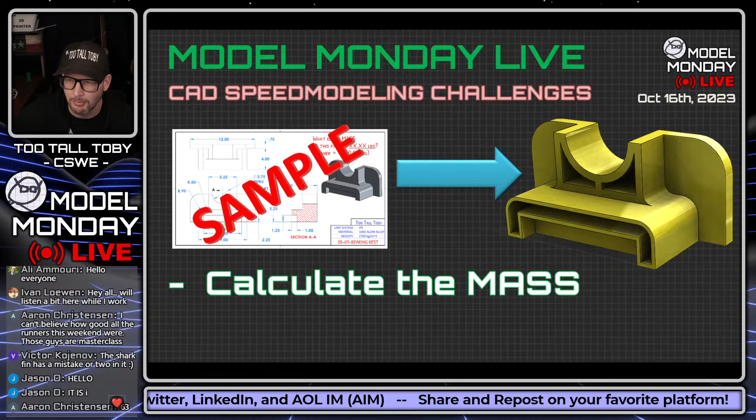Your challenge today is going to be to take a 2D print and turn it into a 3D model as quickly as possible. You're then going to try to calculate the mass of that 3D model, and you're going to enter that mass directly into the YouTube chat. The first person to calculate the mass correctly will win the point for the day.

And today is October 23rd. Hold on a second guys, I got a little bit of an error in the PowerPoint. We're going to do a live correction here. Just look over there for a minute, don't look at what this guy's doing over here. Just look over there, let's make this 23rd. Right, it's the 23rd, we got this, no problem. All right, perfect, yeah, it said 23rd the whole time.

So the basic rules are that you can use any 3D CAD package you want. You can input the density, output the mass. You can use a specified precision, and the first correct answer in the chat will win the point for the day. The units that we use in this modeling challenge, this weekly challenge that we do, is IPS or MMGS.

The materials are plain carbon steel, 1060 aluminum, and ABS. The densities listed are straight out of the SolidWorks library of materials. If those densities are different in your library, you're going to want to create your own custom library for these materials so that you can quickly calculate the correct answer. So be sure to check these materials, grab a screen capture so that you've got them in your library.

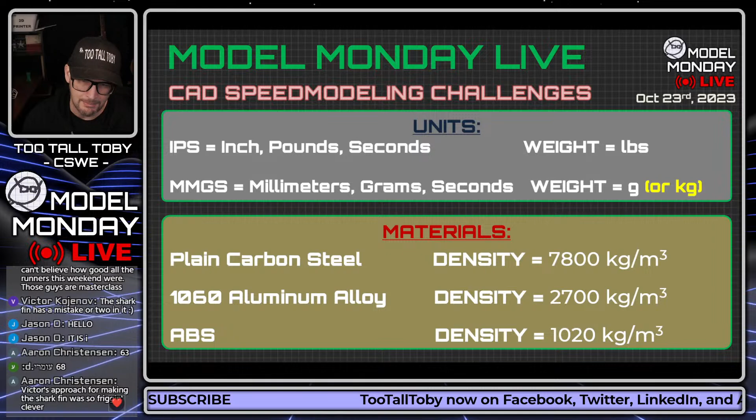Make a custom library. I've got a video showing how I create custom templates in SolidWorks and how I use sensors in SolidWorks. I've also got a video on the Onshape YouTube channel about how to create the custom materials in Onshape for these challenges. So make a custom materials library, that way you can add those custom materials more quickly.

The advanced rules are this is meant to be fun and good-spirited. Now guys, just want to say that I know that with the Victor K and the Will match, I made a mistake, and the mistake was that I gave the point to the wrong person. I gave the point out incorrectly because I misread the answer.

But what has not happened yet in the tournament is there hasn't been one single print so far that has gone out missing a dimension. And I gotta admit, I'm a little surprised about that, and I'm kind of waiting for it to happen. It makes me very nervous because I feel like it's inevitable that I will release a print and it'll be missing a dimension, and then both of the runners are going to be just kind of scrambling and not really know what to do. And because it hasn't happened yet, the stakes keep getting higher and higher, and it's exactly what Victor's saying is exactly what I'm worried about.

It'll be in the finals. Everything will be built up, you know, it'll be like one round to one round, and then I'll miss a dimension on the print and then have to scramble to resolve that issue.

I'm very surprised that hasn't happened yet. It has happened a couple of times on Model Monday Live, so it really is meant to be fun and good-spirited, and eventually I will make mistakes like missing a dimension on the print or something like that. If that happens, we'll just have to figure it out together. And the Ivan exploit is permitted during Model Monday Live, so if you see any opportunities to use the Ivan exploit, feel free to do so.

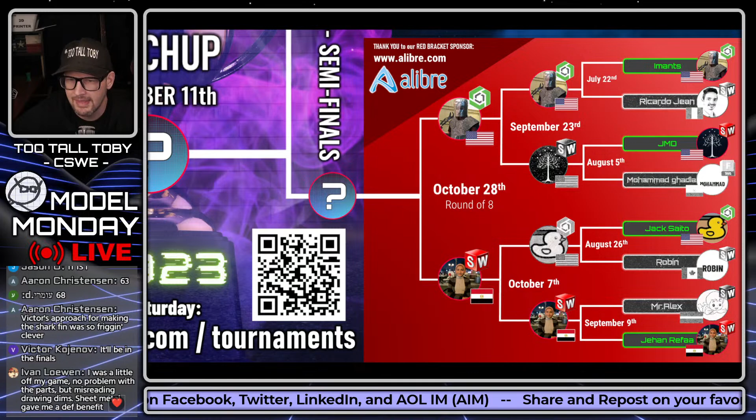The red bracket's going to feature Imants running Onshape this Saturday versus Jehan Refaa, the last standing Egyptian in the tournament. Jehan is running SolidWorks. So a little Onshape versus SolidWorks action.

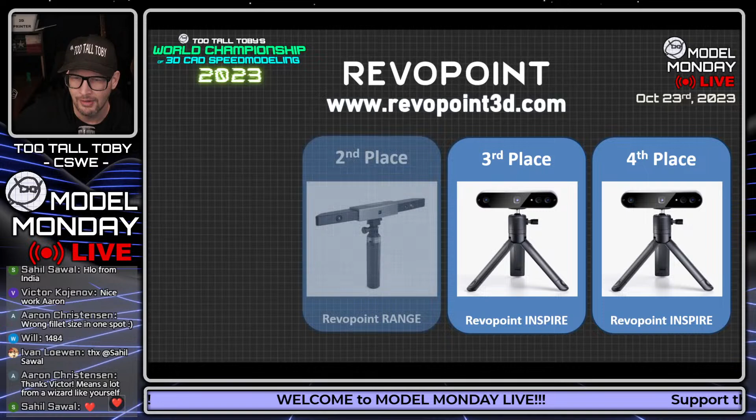The top 4 finishers here - Ivan and Victor have already locked up, guaranteed themselves a 3D scanner. And Aaron C versus Pranav, Imants versus Jehan Refaa - we're going to see who gets in there and wins a 3D scanner this Saturday. So very, very cool stuff here for our top 4 runners.

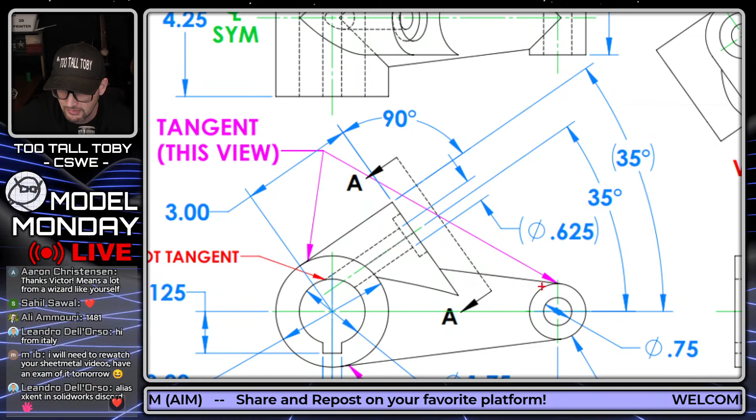There's also some tangency issues happening with this model. The conical face runs tangent to this cylinder, and the conical face runs tangent to this cylinder down here. Because of this tangency, it really makes sense to create these cylinders first, and then go back and create the cone, which when we create a cone in Onshape or SolidWorks, any 3D CAD, we generally create as a revolve. So you create one cross-sectional profile, and then you revolve that about a center line.

That's how you create a cone. And then the final feature on this model, which is going to be pretty tricky, is going to be this upper section, this tombstone shaped section that's getting extruded down into the rest of the shark body. The solution that Victor came up with, I thought, was super clever, creating that geometry as an extrude and then doing a full round fillet. That's definitely not how I would have done it, but I thought it was such a clever solution, and I think this gives us a good opportunity to maybe see a different solution, but definitely impressed with the solution that Victor came up with in the live stream this weekend.

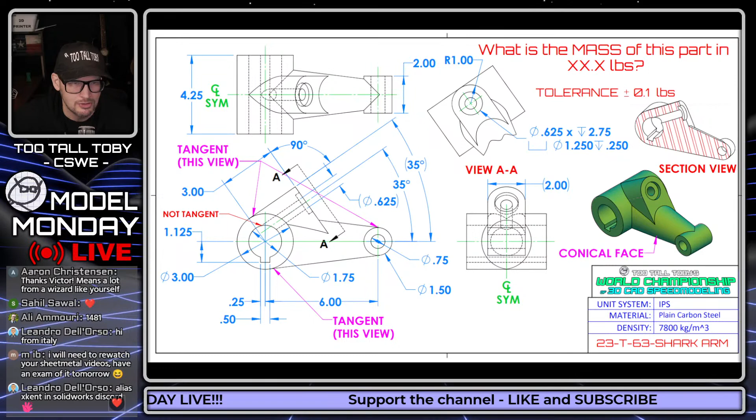So if you want to go back and watch that live stream, go for it. But for today, what I'm going to do is try to model this up using Onshape in just a few minutes here.

So let's get into Onshape here. Here we go. And once we get into Onshape, let me just bring up the PowerPoint again. Okay, so once we get into Onshape, what we're going to do is go into a new document. So we're going to say create document, new document. This is going to be called

23-T-63 shark arm. So this way, if you want to sign up for a free account of Onshape, onshape.com/free, you can actually search for this document in the public space, and then you can see the entire feature tree. You can see everything that I'm doing here.

So I'm going to start out by going into my workspace units and changing my workspace units to inches and pounds just to match the drawing. And then, like we discussed, I'm going to start out with the geometry that represents those 2 cylinders.

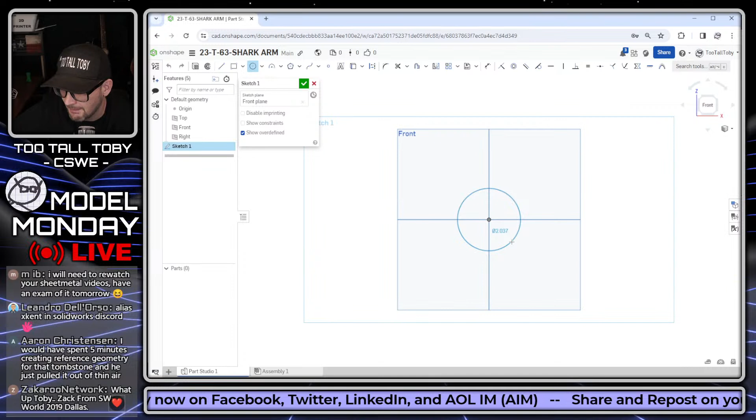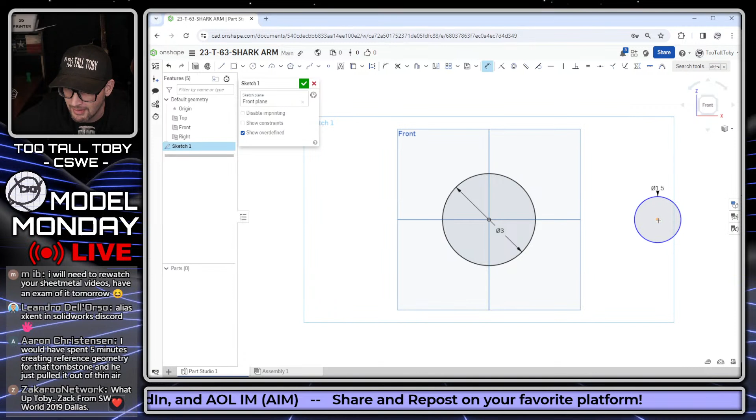However, in this first sketch, I'm going to opt to create basically all of the layout geometry, or at least quite a bit of the layout geometry that I'm going to need for this model. Because what you learn about CAD, especially if you start using a different CAD system, is that oftentimes you can create geometry and then use and reuse that geometry in other areas of the model, whether that's through contour selection in SolidWorks or just kind of the natural way that Onshape works.

Different CAD packages are going to work a little bit differently, but sometimes you'll find that it is beneficial to create a significant chunk of the geometry in the original sketch, or the original layout. A lot of times I think of this as layout geometry. I don't think of it as traditional sketch geometry, but a lot of times you can get in here and create this kind of layout work and then take advantage of this later on in the design process.

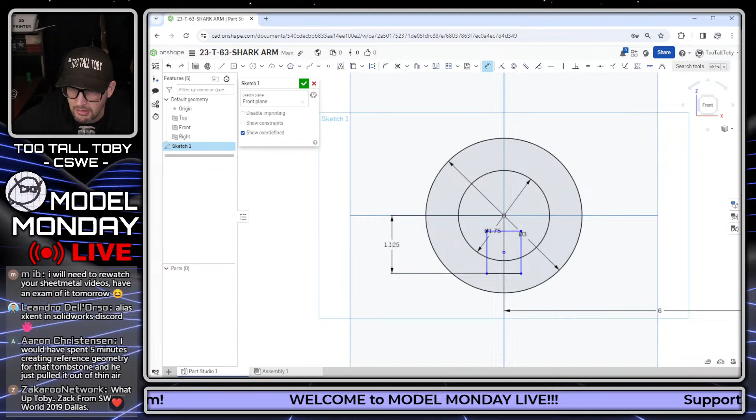So I'm going to just create a large chunk of the geometry here in this initial sketch, and then try to use this geometry a little bit later on as I'm creating the final features for this thing.

We don't need to trim in Onshape. We can just kind of leave that geometry as is, as extra.

And then I'm going to create these tangent entities here. So this tangent line that comes down, and then this is just going to come down to the center. I'm just creating half of this shape because this is going to be my conical shape here, so I'm just creating half of this model. I'll take this and make those tangent, and then I'll take this and make those tangent. That is going to set me up pretty nicely for doing that revolved shape when the time comes.

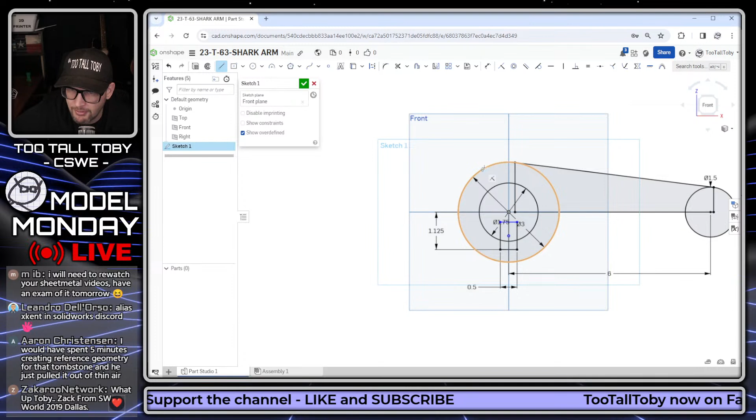And then the final thing here is maybe creating that region that goes from this line tangent up to this area. I don't have to create this entire shape because I'm going to end up creating a plane at the end of this point here. But this is just kind of a different way of approaching this model.

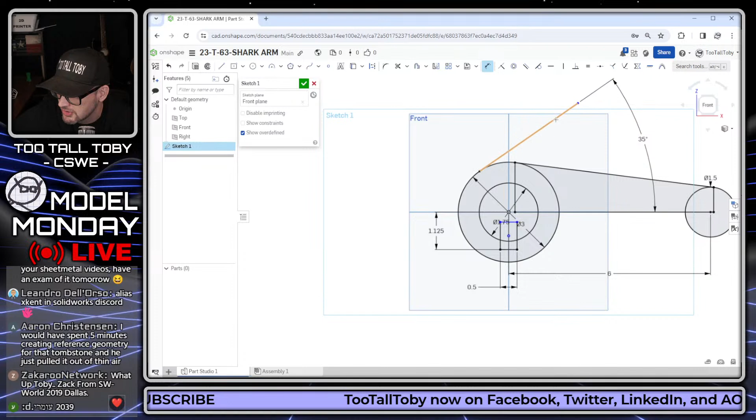That's what I wanted to show you guys today, just a different way of maybe coming up with this solution. The way that Victor did it, I really like the way that Victor did it. I encourage you to go back and watch that live stream. But this is just giving you guys a different approach to creating the same result.

All right, so now that I've got this geometry in place, I'm ready to jump into my first extrusion. My first extrusion is not going to be of the entire sketch, but just of one portion of the sketch, maybe just of this kind of circle here.

A little trick in Onshape that you can use is if you pick the circle first and then jump into extrude, then it'll just get that circle. Although in this case, I didn't get exactly what I wanted. All right, that's all right, I'll just go through and pick the regions here.

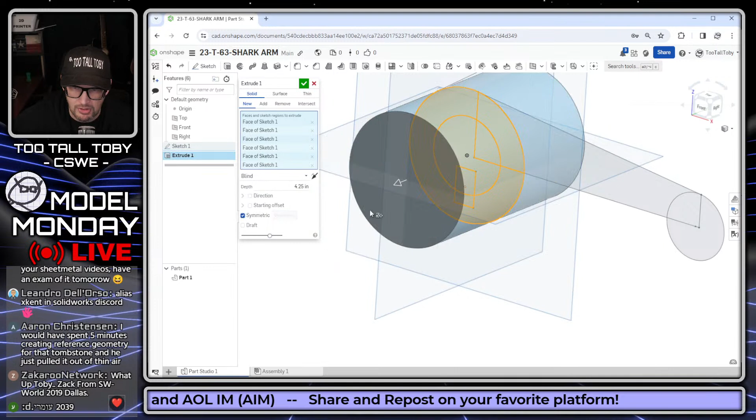So now I'm going to turn that into an extrusion with a depth of 4.25, and I'm going to say that's going to be symmetric so that it goes right down through the center. And now I'm going to show that original sketch, and I'm going to do the same thing here with this back section of the model.

So we're going to go into an extrude here, take this out to a depth of 2 inches, and again, we're going to say this is going to be symmetric.

Now we're going to jump into our revolve command. So for our revolve command, we're going to be using this geometry here and then this axis, and I think that'll give us what we want. I think I saw either Victor or Juiced revolve it this way, and I was like, oh, that'll actually work.

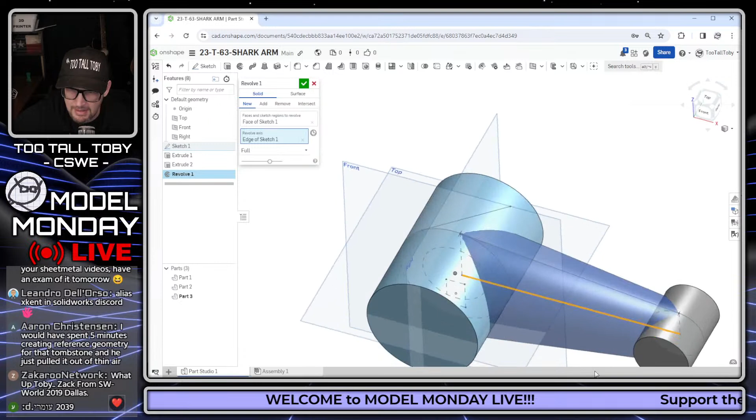That's interesting. I don't know if we need to go and get the additional entities or the additional regions here as part of that sketch. I think it'll be kind of an identical result. I guess we'll find out at the end here when we get to the mass properties of this model. But I think that's going to give us what we want there.

One way that we could... I guess we're not going to be able to see the tangency if we were to try to check it. So, all right, I'm not going to worry about it right now.

So now what I'm going to do is I'm going to pick this line and this end point here, and then I'm going to jump into a plane command, and that creates a new plane perpendicular to that line at the end point. And then I'm going to start a new sketch on that plane.

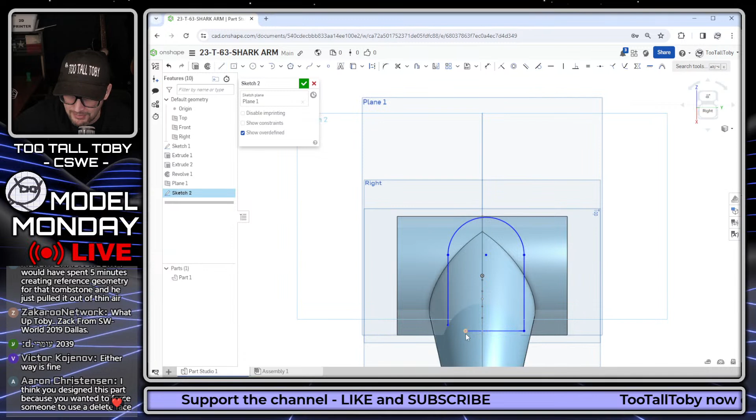This is how I would have created this geometry. This is how I actually did create this geometry when I was auditing this model. Instead of creating it from the side view, I would have created it with this kind of tombstone shape, and then use this tombstone in Onshape to create my extrusion. Definitely a different approach here, working from the geometry that's on the auxiliary view.

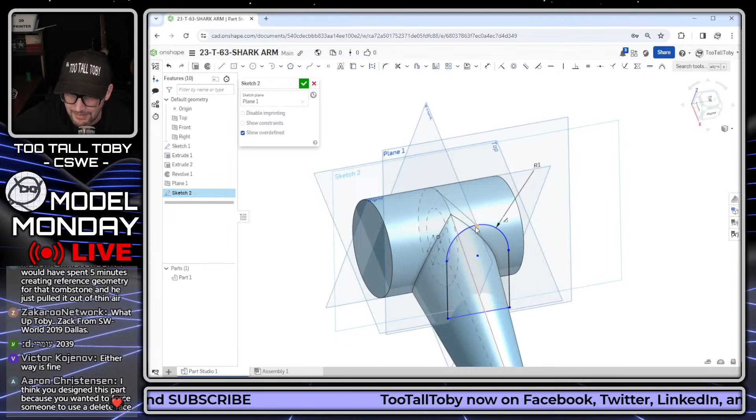And this was, when I saw the way that Victor did it in the live stream, I was really surprised and impressed, and definitely different from how I would have done it. But he came up with a great solution that definitely worked.

Shout out to Victor for coming up with that solution.

The problem with this solution, the gotcha, is where do I really anchor this lower line? You just have to look at it and make sure it's buried in the model. You can actually see it here because I'm extruding the wrong way, so it is buried in the model.

So then I'm going to do a reverse direction here, and let's see if we can go up to next, what the preview shows. Okay, yeah, that looks pretty good. That's what I want. It's looking a lot like what I'm seeing on the print, so I'm going to hit the green check mark there. That gives me the geometry that I needed for that region.

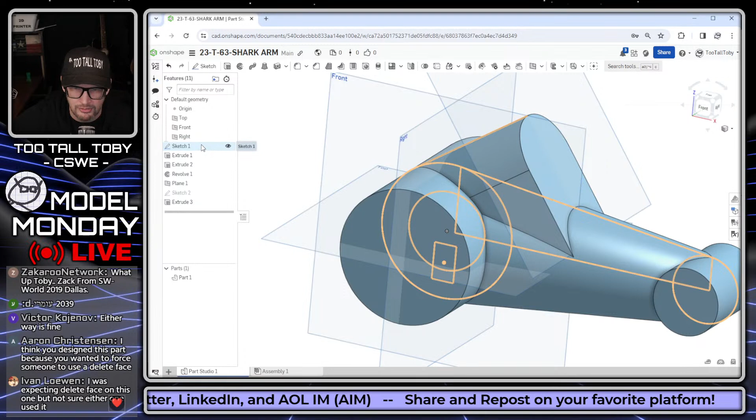Now I can go back to my original sketch here and use that original sketch to do my remove. I'm going to remove the tombstone shape here, so we're going to get this region.

So when a sketch is embedded inside of the model, you need to use the tilde command to select the interior region. You just hold down the tilde key on your keyboard while you're selecting.

And then this is going to go through all symmetric, through all in both directions. It looks like I have one more region I got to select there, so I just hold down the tilde key and choose that other one. There we go. That gives us that keyway shape.

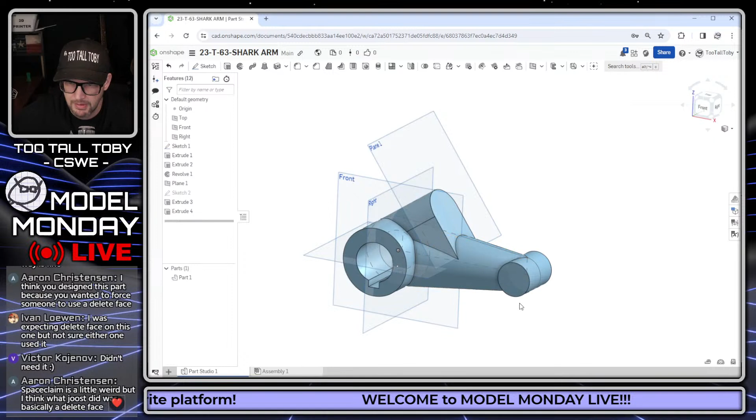Now for this end here, I could do this as either a cut extrude or as a hole. For me, I'm just about as fast as both. I know some Onshape users are a lot faster just making the holes, but I'm not quite there yet. So I'll do an extrude, remove, through all.

And then for this final hole here, again same thing, I could do it as a cut extrude or a hole. Let's try and do this one as a hole. I'm just curious if I can actually get it to do what I want it to do.

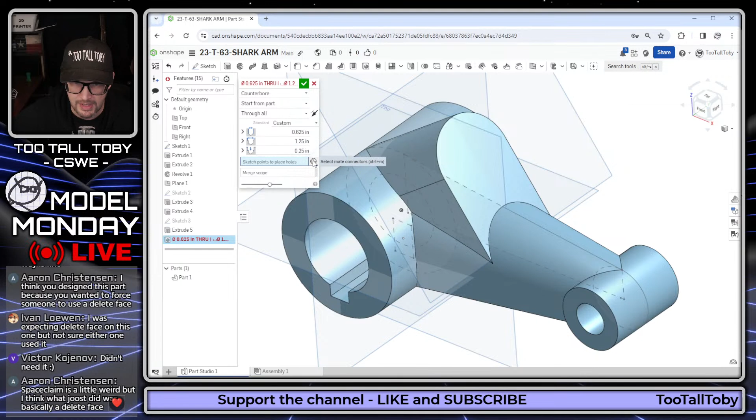So this is going to be a counter bore, and then the counter bore parameters are going to be 0.625, tab, 1.25, tab, 0.25, tab. Then for the location, I'll pick this option here for the mate connectors, so I can pick this edge and activate the existing mate connector that's on that edge. Onshape would tell me it's not making a new mate connector, it's activating the existing one.

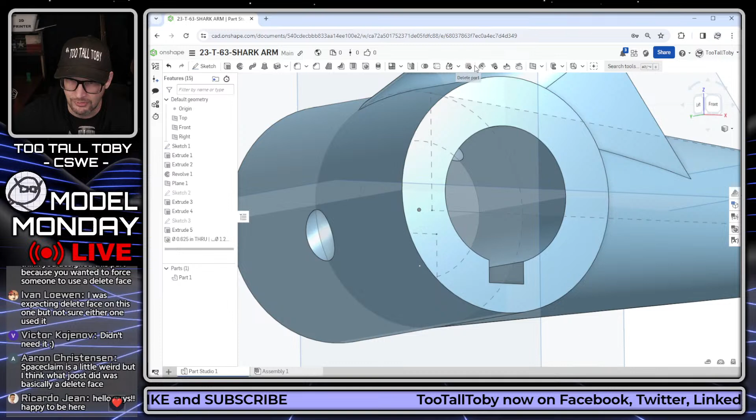Then what I can do is hit the check mark, and that leaves me with this hole running through all. Then I could do a delete face for that hole. So delete face, pick this face here, and hit the check mark.

Wait, didn't give me what I wanted. Wait, do I have to leave open? No, cap, or no, heal. There we go, there we go. So I could do it with delete face. We always like delete face, we get bonus points if we do a delete face there.

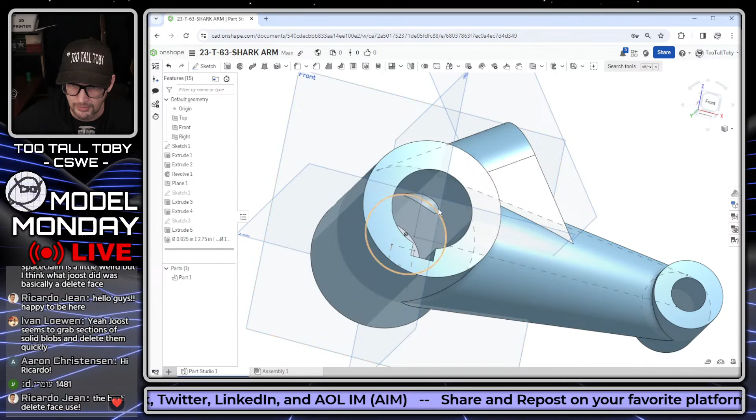Or the other way we could do that is to edit this feature here, and instead of this feature being a through all, we could say we want this to go blind. I do have the depth listed there on the print, the depth I think I listed at 2.75, as a kind of helper to help out the runners, letting them know there's a depth to that. Either way, I would do it with delete face, because delete face definitely gives you the ultimate extra point you can get in this game.

So now I'm going to do an assigned material. This is made out of plain carbon steel, so from the TTT custom library we're going to go plain carbon steel, pick this face, go to our mass properties, and the mass is 11.7 pounds.

And that is correct, I remember that one actually, I don't have to look at my answer key. I don't know if I'm going to remember the next one, but I do remember that one. So 11.7 pounds is the correct answer for that model.

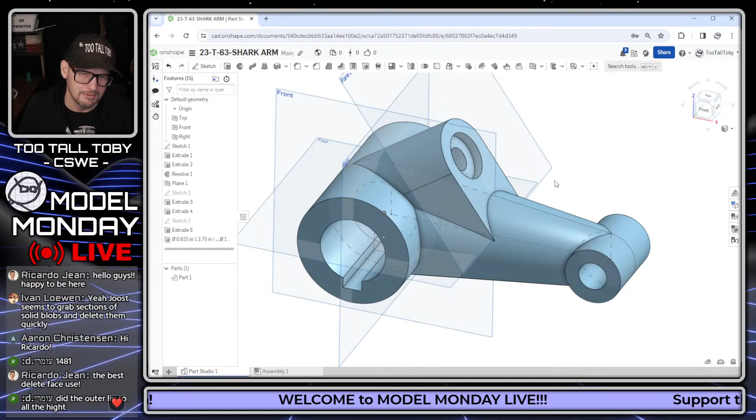And that's how you would do the shark arm in Onshape. I think you could pretty much do the same thing in SolidWorks, with the exception of the hole wizard working a little bit differently. But the rest of the stuff I did, you could do all in SolidWorks as well. You could create that entire layout as the first sketch and reuse that layout for all your features, and do the same thing in SolidWorks.

Of course, if you want to see the way the absolute master does it, check out the live stream from this weekend, and you can see the way Joost did it using SpaceClaim. But that should be pretty close.

Goncalo says SolidWorks crashed before finishing the first part. Yeah, that could be brutal. That's definitely something I don't miss. I don't really get that much crashing with SolidWorks, but I do get an awful lot of it just going unresponsive, and then coming back however many seconds or minutes later. That's definitely something I'm enjoying in Onshape, that really doesn't happen - it just kind of is there waiting for you to work, not you waiting for it. So that's something I like.

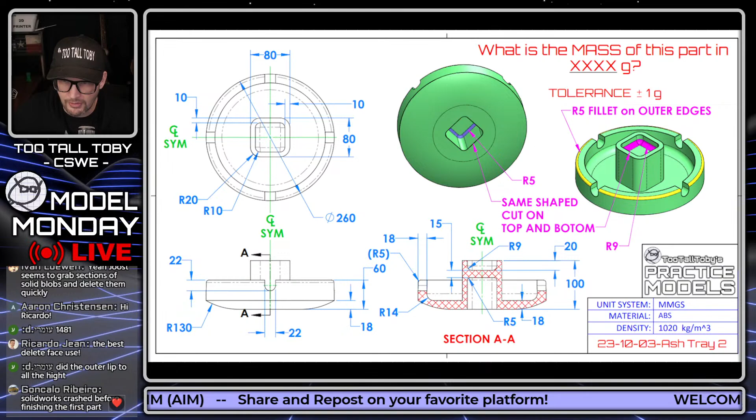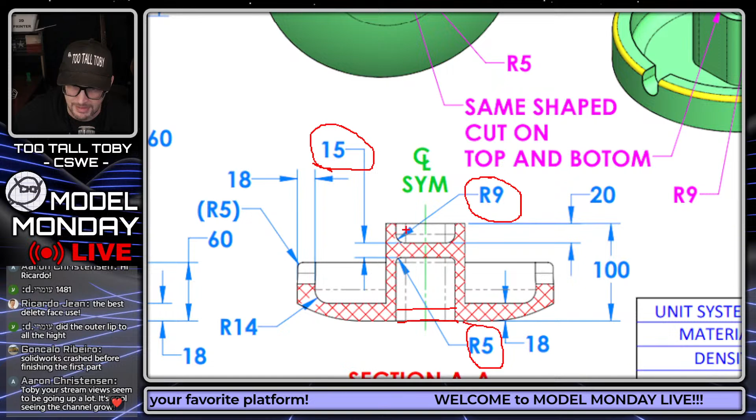Let's get into this first answer here. So this model that I challenged you guys to make has a bunch of dimensions that have changed since the tournament last year, but we also added these fillets here. The reason why is because I think when Ivan did this, he just figured out that the width here at 15 is all that really matters. So I think he just made the cut go down to the bottom with an offset distance of 15 - he started the cut up top, had it go down, and stop at the bottom with an offset distance of 15, and that was it. That would have been correct, and that would have been an Ivan exploit if these fillets weren't there. But now that these fillets are here, that's kind of meant to thwart the Ivan exploit.

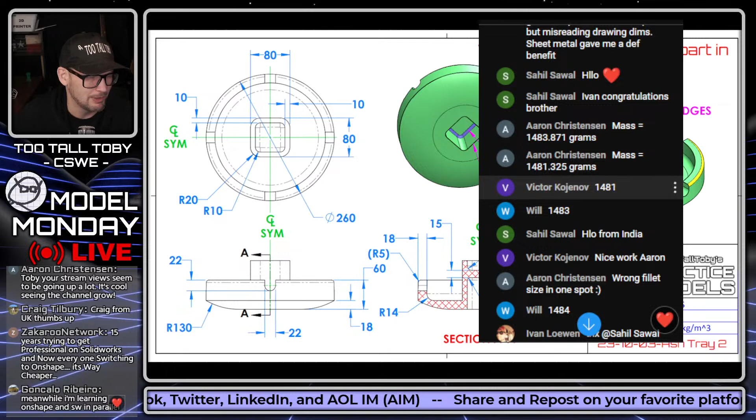All right, let's take a look at some of the answers that came in for this challenge. I saw that Aaron C was flexing right in the beginning. Aaron C coming up with 1483 grams, revising immediately to 1481 grams, just before Victor K was able to come up with the same answer, 1481. Will coming in at 1483 grams, then revising to 1484.

And Sahil is here in the chat. What's up, Sahil? Welcome, didn't get a chance to say hi to you earlier. And MIB is here - I need to rewatch your sheet metal videos, I have an exam for it tomorrow. Awesome, yeah, good luck with that.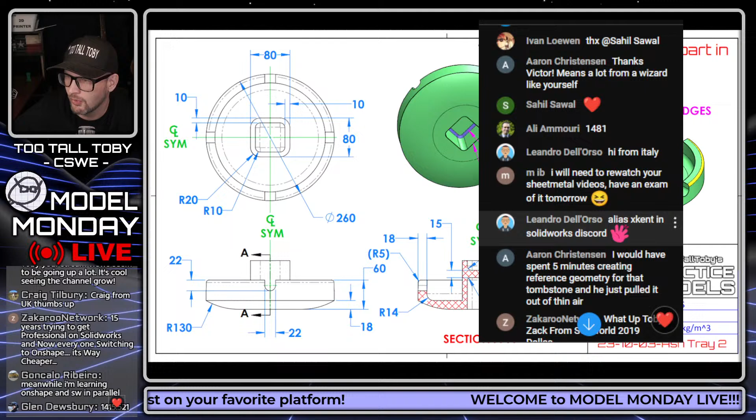X Kent from the Discord, from the SolidWorks Discord. Oh nice, nice to see you over here as well.

Would have spent 5 minutes creating reference geometry for that tombstone, and then he just pulled it out of thin air - he just sketched it from the side on this part here. When Victor did it this weekend, instead of creating a new plane and sketching the tombstone, he just created this shape on the front view, extruded it to the width of the tombstone, which is 2 inches, and then did a full round fillet to get that rounded off shape at the top. Very, very clever, especially considering he just saw the print and ran with it. Very impressive to be able to see that model and just come up with a plan, so definitely check that out.

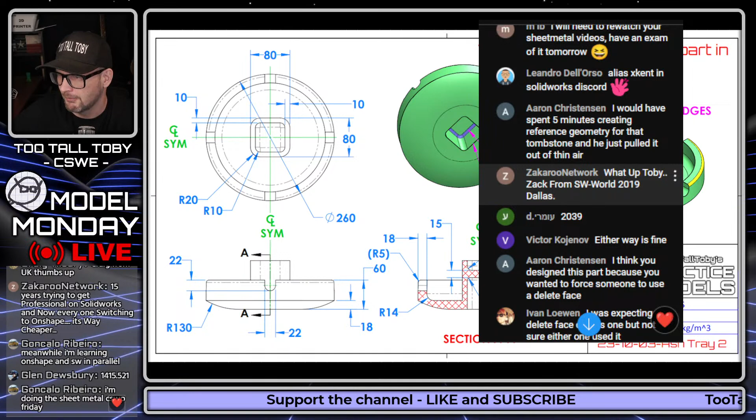Omri coming in with the answer, 2039. Zach is here from SolidWorks World Dallas - front row seat, Zach. GoPro Zach, welcome, thanks for joining us again in the live stream.

Think because you designed a part, you wanted someone to use... Yeah, exactly, I wanted somebody to use delete face. That's exactly right, I was hoping somebody would use it.

And Juiced was doing a lot of direct editing. Ricardo Jean is here in the chat, welcome, welcome. Ammouri coming in 1481, revising to 1481, I should say.

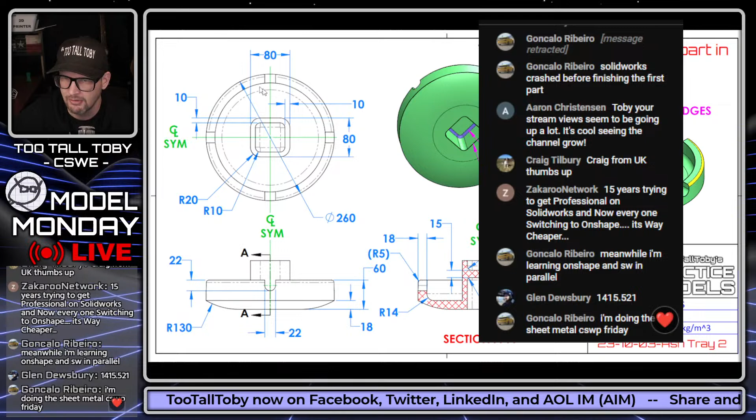And Glenn in the chat coming in here with 1415. Very, very nice. Let's see what the correct answer is - the correct answer is 1481 grams, so I think that point is going to go to Aaron C. If you guys want to give Aaron a GG in the chat, 1481 plus or minus 1 gram is the correct answer. Congratulations, well done to everyone else who got the answer correct, and really well done to anybody who even took this challenge. These are not easy parts, so it's very impressive that you guys are getting in here doing this challenge. But GG, well played, GG to Aaron. Congratulations, Aaron gets the first point for today.

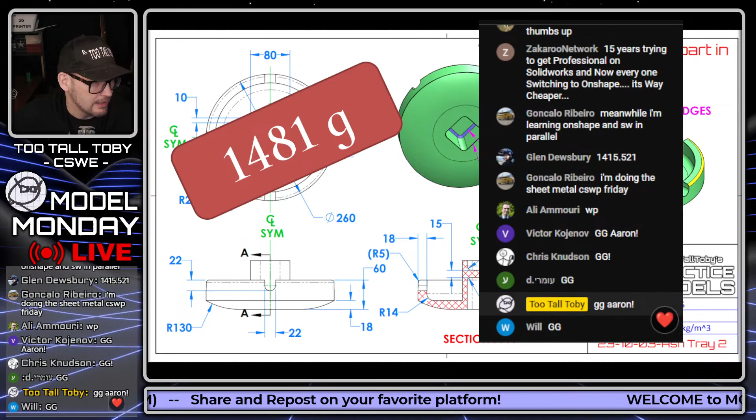And we are going to move on to the next challenge here. That next challenge begins in 3, 2, 1, go. What is the mass of this part in x.xx pounds? So take a look at this model - it's in IPS, it's in plain carbon steel. What is the mass of this part in x.xx pounds?

There's a section view of this part, and it only has one dimension, that's it. I don't know why I didn't just put that on the front view of the model and be done with it - I guess I just decided to mix it up a little bit and put this on the section view. So good luck on this one. Maybe it looks pretty easy, but you might find that it's going to take a feature that we don't really use that often in Model Monday Live. So good luck on this one. What is the mass of this part in x.xx pounds? Grab a screen capture, try to model it up, see what you come up with. This is a good song for modeling.

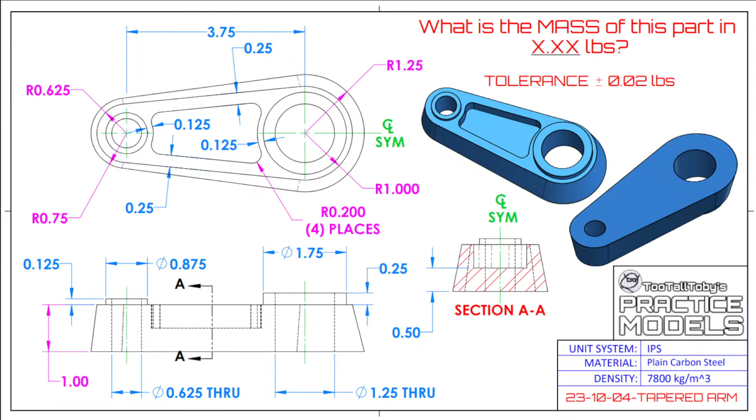Alrighty, I'm drinking some Emergen-C today. My drink today, no Waterloo today. Had a little bit of a sore throat this morning.

All right, Glenn revising through on that last model. Nice job, 1483, keep going bro. You got to shave 2 grams off somewhere.

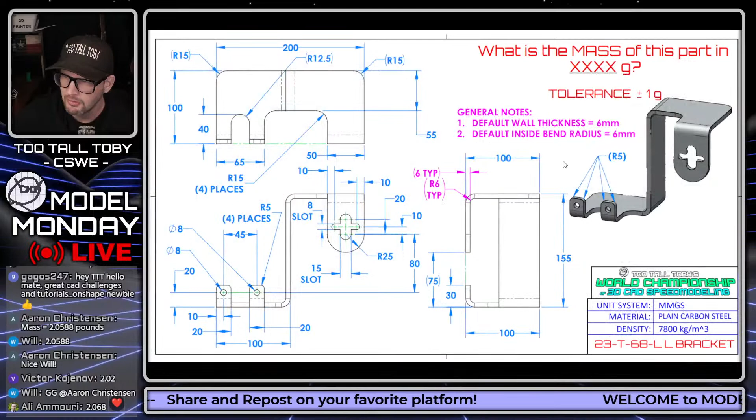All right, let's see what else we got here. I think somebody was asking about 68. I kind of wanted to try 68 in Onshape, kind of test out my Onshape skills. I'm going to use a little bit of what I learned from Ivan, watching him do this thing using SolidWorks. He did a really cool technique that I liked, so I think I'll do this one here.

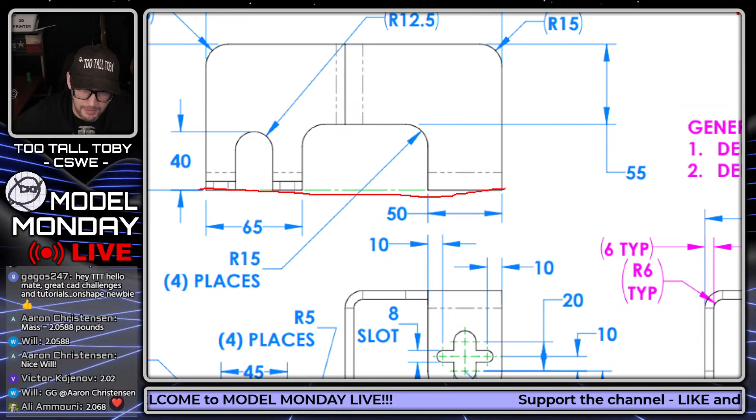I think what you'd want to notice on this one, first of all, is that it is a sheet metal design. So you want to make sure you use some sheet metal techniques when modeling. You want to notice that the wall thickness here is 6 millimeters. And you want to notice that these flanges sticking out the front of the model are coplanar. Knowing that might help you make some good decisions when it comes to creating this thing in sheet metal, and that's exactly what I saw Ivan do during the live stream. So I think that's what I'm going to try to do here as well.

Where's the extra 0.03 pounds? Well, I hope that wasn't in reference to my comment. Maybe that's just a reference going on in the chat there, Victor. I'm going to assume that's what that is, so I'm going to just ignore it and let you guys figure it out in the chat.

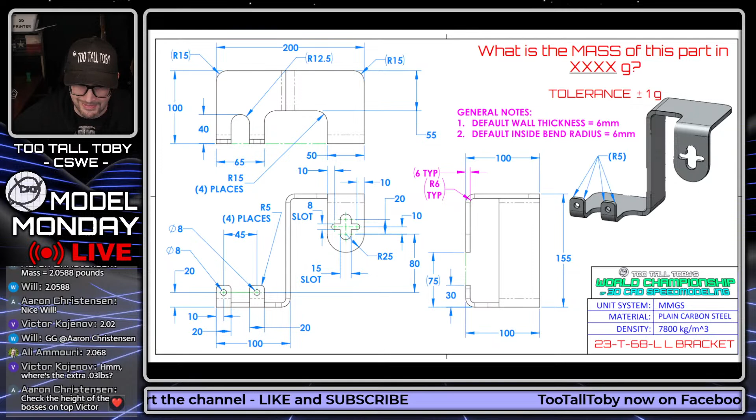All right, here we go. Let's close this document and start a new one. Create a new document - this one is going to be called 23-T-68-L L bracket. This is going into the public, it's a public document here on Onshape. So if you're using Onshape, whether the free version or the paid version, you can search for this text string, find this model, and re-examine how I did this.

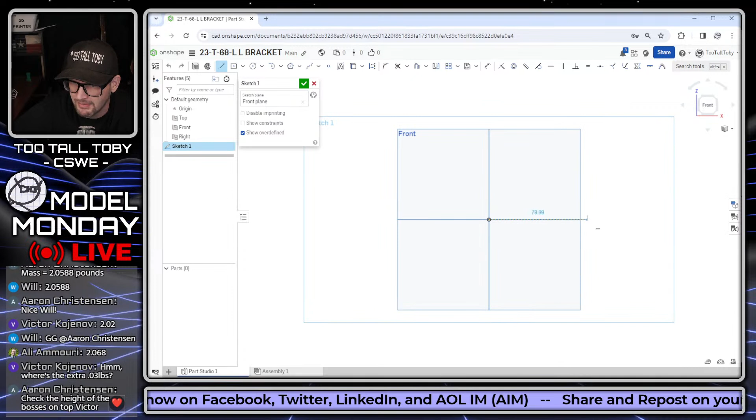And this is going to be a sheet metal design. With sheet metal in Onshape, what I like to do is start out by creating a profile that's going to get extruded as a thin feature. For me, that profile is going to come over, come up, and then come over again. Now what I'm doing here is I'm drawing this shape right here, but you'll notice this shape kind of goes on two sides of the sheet metal. And when you have a scenario where you're ending up on two different sides of the sheet metal, you have to be really careful about your dimensioning. It's really easy to inadvertently shortchange yourself depending on how the dimensions are created.

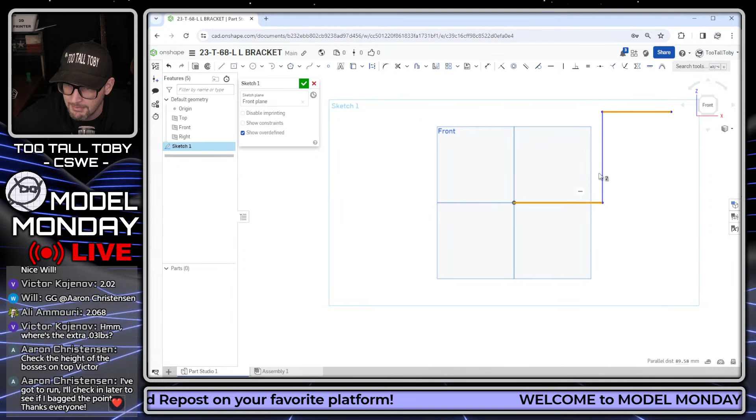So what I like to do in this scenario is take that geometry and immediately perform an offset. Now the downside to doing an immediate offset of the geometry is that you then have an extra dimension that you have to manage. But as long as you're pretty confident that dimension is not going to change, you can really set yourself up to make the dimensioning of this sketch more reliable.

So for example, I'm going to create a dimension here that represents the overall height of this model, and the overall height of this model is 155. Well, if I had worked with that original sketch, I would have had to create that dimension not to the very top, but to this line here, which means the dimension would have been 155 minus 6 millimeters, and that could become a little bit cumbersome to keep track of.

And so instead, what I can do is I can create these dimensions now to the inner and the outer geometry of the model.

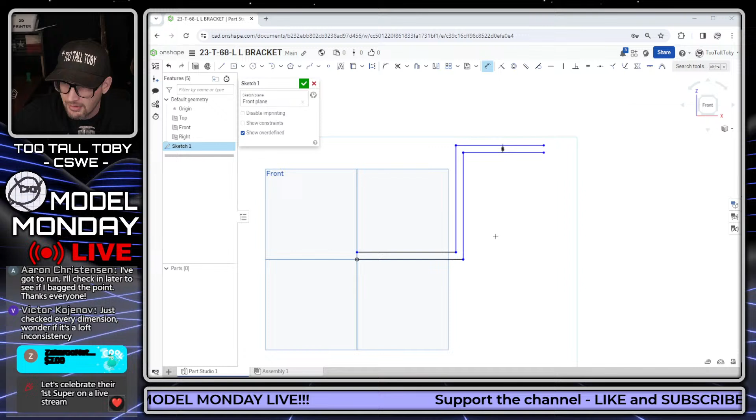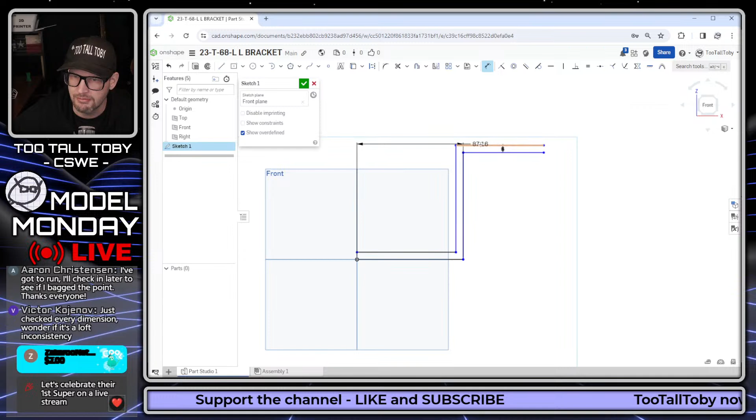Thank you, Zacharoo. Glad these tutorials are helpful. So here what I can do now is I can create that dimension from the bottom line to this upper line and just make it the natural dimension, 155. Now, that does mean I'm going to have an extra dimension to manage if the wall thickness was to change later on, but I think it's worth it.

So similarly here, when I go to create this dimension coming across, I can be pretty confident that this dimension can be created at 100 millimeters, just kind of working with the natural dimensions on the print. And I can be pretty confident that this dimension over here to this point is going to be 200 millimeters, again just working with the natural dimensions on the print.

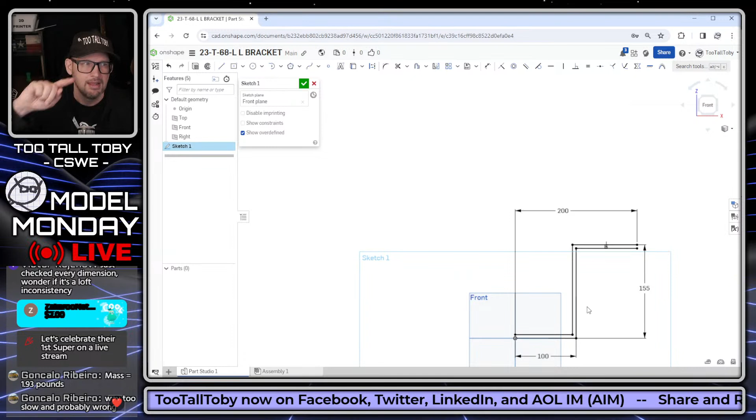So it's just a little trick that I use when I'm working in sheet metal. A lot of times I'll just kind of sketch in an offset for the sheet metal thickness if I've got dimensions that are bending in two directions, for the sheet metal itself. So now I'm going to exit that sketch.

I'm going to go up to my sheet metal command here. And with the sheet metal command, what we do in Onshape is we say we want to use the middle option here for extrude. And then we can choose our 1, 2, 3 entities, and then specify that we want that material to go to the inside or to the outside.

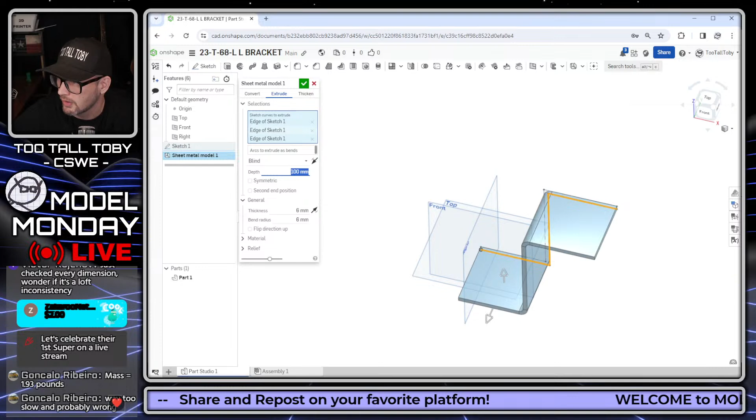I want it to go to the inside. I want it to be 6 and 6. And then I want it to go out to a depth of 100 millimeters, the max depth on this thing. And the reason I'm going out to that max depth of 100 millimeters is because I want to make sure that I have geometry that I can then cut.

So then I'm going to do a cut extrude to remove this. Very clever approach, in my opinion, and one that I totally stole from watching Ivan this weekend.

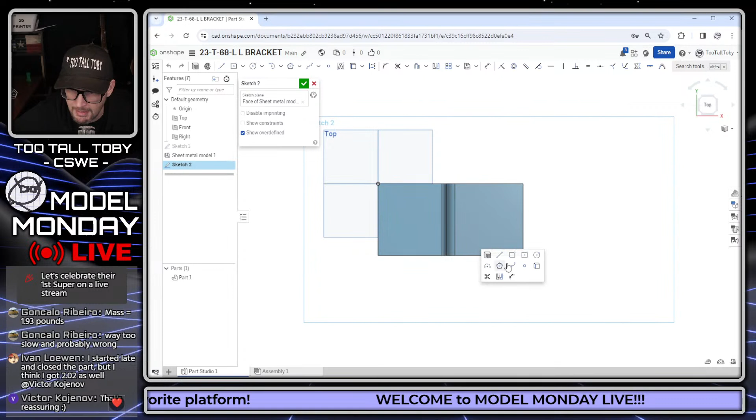100 millimeters, 6, hit the green check mark, pick this face, begin a sketch, orient my view, and now I'm going to sketch 2 rectangles, or actually a rectangle and a line arc line.

So 1 rectangle there, and then 1 line arc line. Wake up that point there so I can get horizontal. Then we'll close that off. And then I'll make these guys all collinear, and just add in the dimensions for those cuts.

So this comes over 20 millimeters. Okay, well, the depth of that is also, I think it's also 20. That was a misclick.

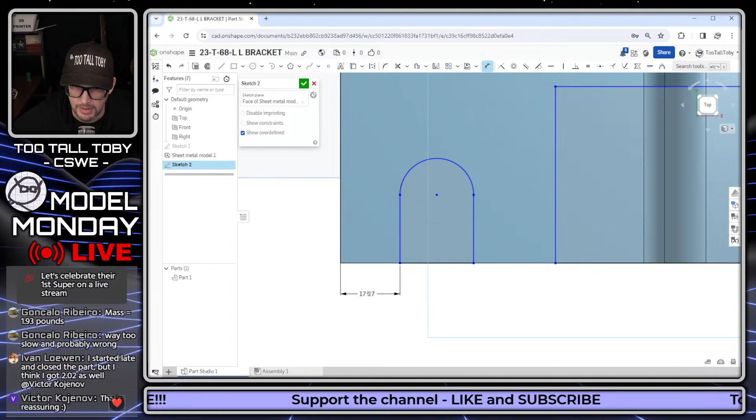We'll come over here, 20 millimeters. This thing has a radius of 12.5, and the distance from here to the tip of that arc is 40 millimeters. And then the overall width of this lower section of the model is 65 millimeters. And then the overall width of this upper section of the model is 50 millimeters. And then the distance from here to here is 55 millimeters.

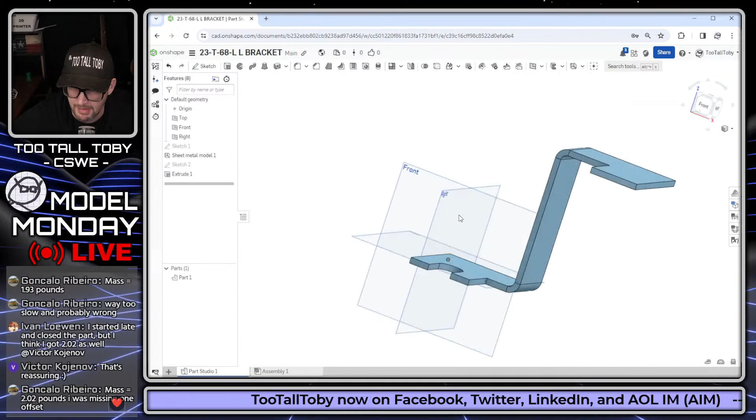So very clever from Ivan there, creating that geometry in that manner. This is going to be a remove through all, and we're just going to rip through all of that sheet metal geometry. Now we can get in here and start adding some of these fillets.

And another thing that I saw Ivan do that I'm very excited to see works here in Onshape is he created these fillets by just doing a window select on that corner. Makes it a lot easier to create those fillets looking down from the top, and it looks like that also works here in Onshape. So much easier than having to rotate the view and find those fillets.

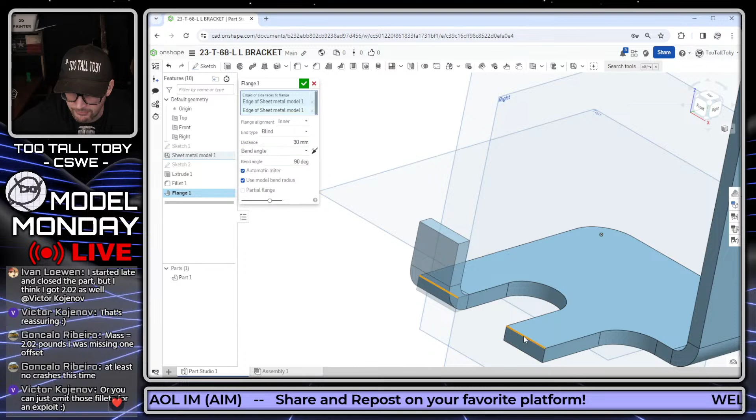Very, very nice. And then we are going to create some tabs sticking up here. So this is going to be what's called an edge flange in Onshape, sticking up here, and that's going to go up to a height of 30 millimeters. And then the location of that edge flange is going to be flush to the original location, so just kind of bent right from that original location. So we'll use the option here for outer to create that specification.

And now we can create our fillets here on the corners of this part. This is going to be a radius of 5 millimeters for those corners. So 5 millimeters on here, here, here, and here.

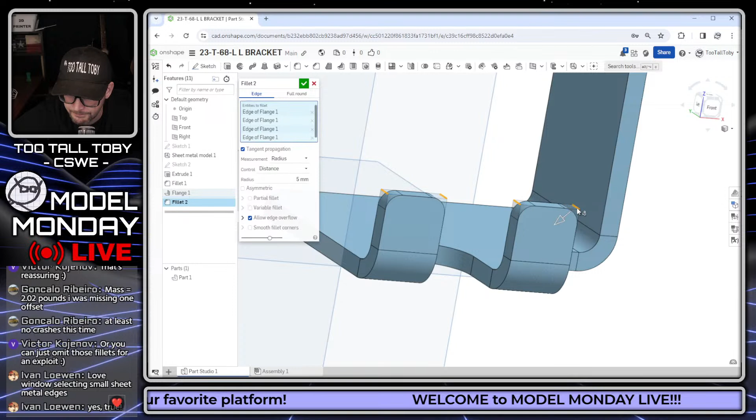And then we are going to create our sketch for our 2 holes here. This is going to be a diameter of 8, and over here we're going to create a diameter of 8 as well. Then there's just a couple of dimensions to lock these things in: 20 millimeters from the bottom of the part, at a spacing of 45 and a distance across of 10.

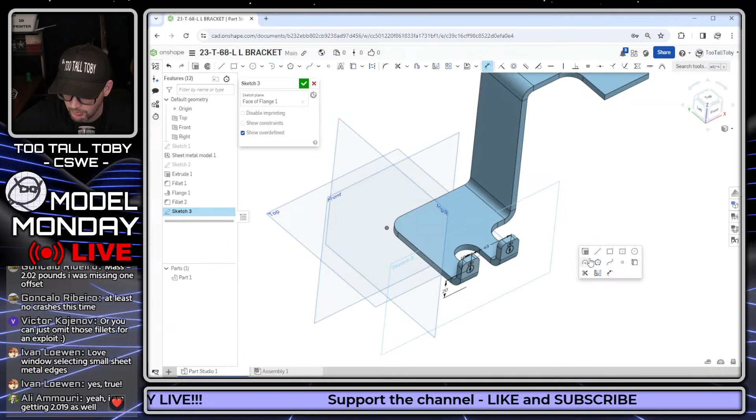All right, we're almost done. A couple more features here. We'll do a remove, through all, or up to next. Either one will work for that one.

For this final feature, once again we're going to do an edge flange, sticking down here, reverse the direction on that edge flange, and that's going to come down using the outer option once again to make it flush to the existing material, down to a distance of... what is this distance? It's kind of a weird distance here.

I think I'm going to just make the full round and those slots all in one sketch. I think this is what Ivan did as well, so I'm just completely ripping off everything that Ivan did here.

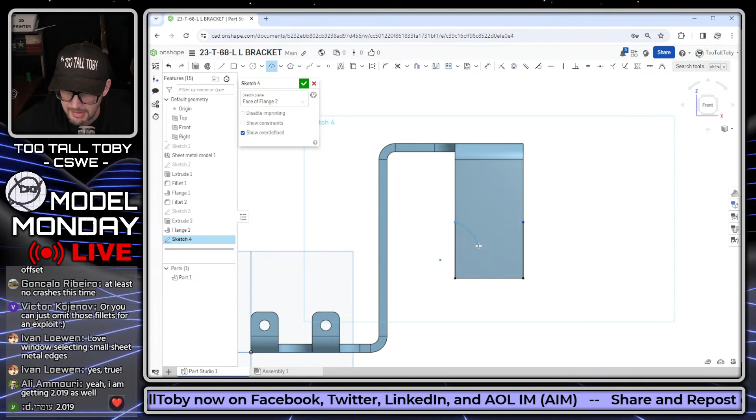So why not learn from the master, right? We'll begin a new sketch here, get normal to, and create a line up to about there. We can create a line up to that same location over here, get those horizontal, and then we'll create an arc between those two and make that arc tangent.

And then we're going to create a distance across to here, and we'll create a dimension that goes from... oh, I'm sorry, that distance is from this hole here to the center of that arc, at a distance of 80.

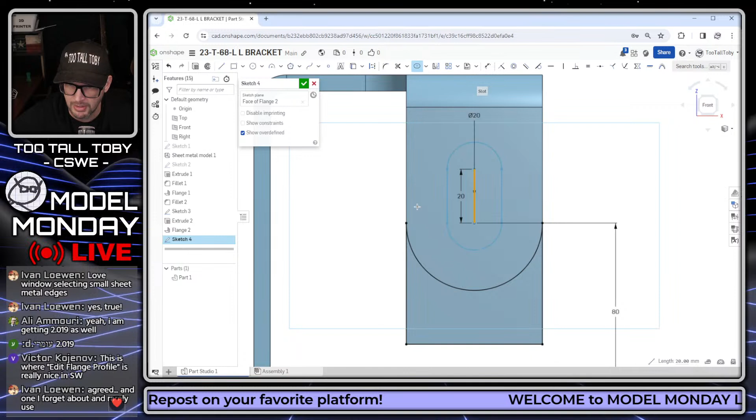And now it's just a matter of sketching in those slots. With Onshape, the way that we do a slot is we actually do a line first, and that line is going to be 20 millimeters. Then you click on that line, go underneath the offset command, and from the offset command you can choose slot. So then that slot is going to have a diameter of 15.

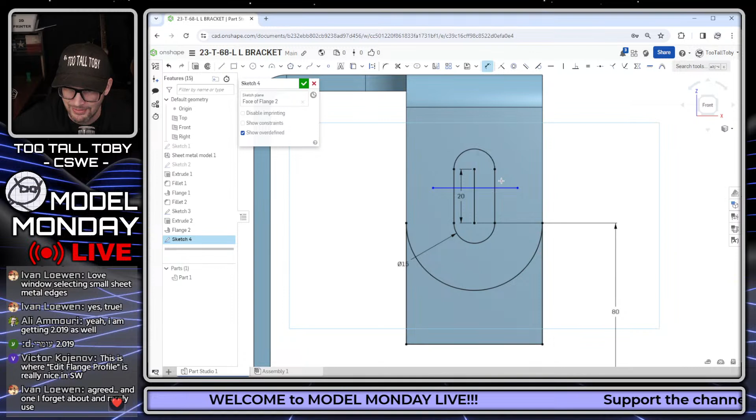Then we're going to do the same thing. We'll make another line here, like so, and take that line and give it a dimension. This one's kind of interesting, the way it's dimensioned here - it's not dimensioned with the length, it's dimensioned from each edge here. I mean, I guess we could figure out what that distance is, but it's dimensioned from each end.

So 10, 10. And then this one - pick on this one here - this one is going to have a slot of 8. And then the final thing we'll do here is just define the location of that slot relative to this point, at a distance of 10.

And then we'll take that geometry and cut remove. So we'll say we're going to cut remove. Oh, look at that - Onshape just magically got exactly what I wanted. Love it, love it, love it.

And there we go, there is that sheet metal design in Onshape. You can always go over here to the sheet metal table, and you can look at this thing in the flat - it just kind of shows up in the flat there.

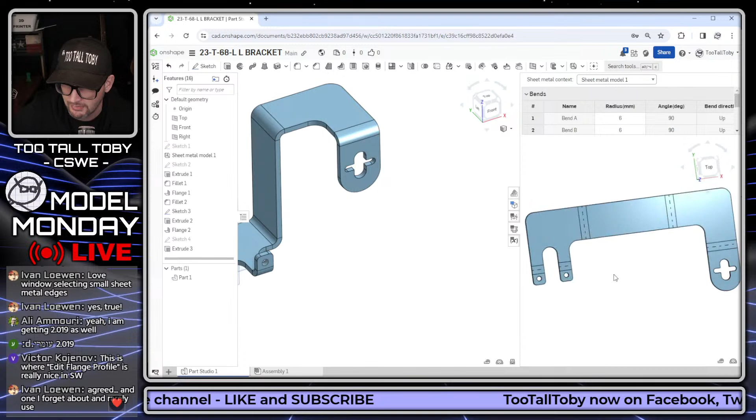And then we can go down here to our assigned material. So our assigned material here is going to be TTT custom materials, and this is going to be plain carbon steel. We'll hit the check mark, and then we'll click on this face, go to mass properties, and we'll see that we're coming up with a mass of 1230 grams. I don't know if that's correct or not - I think it is.

Book of answers here. Yes, 1230 grams, and that is correct. So we did it, got that one correct as well. We're 2 for 2. GG, Toby. 2 for 2 on that one.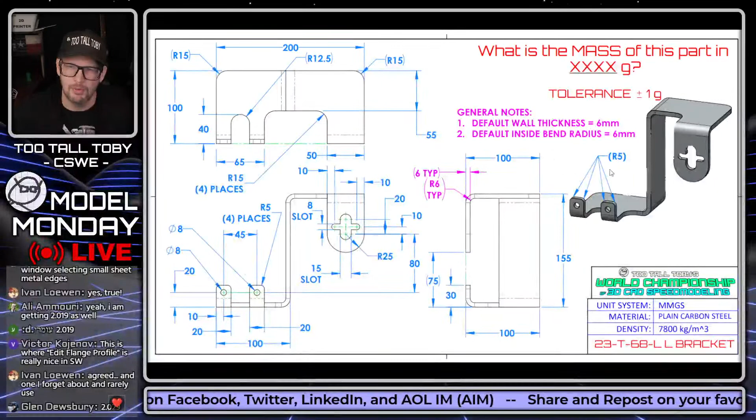And so that is the Onshape tutorials for the day. I hope you guys enjoyed those Onshape tutorials. I kind of get zoned in when I'm doing them because I want to make sure that we can finish before the end of the hour. So I hope that you guys enjoyed that. I'll go back through and look at the chat when we're done here.

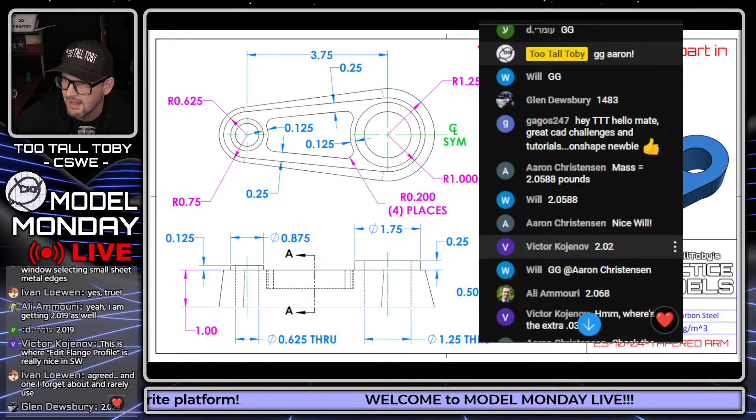Will coming in 2.06 pounds. Victor K. coming in 2.02. Ali 2.068. Let's see here, where's the extra 0.03 pounds? Goncalo coming in 1.93, Goncalo revising to 2.02. Ali Ammouri coming in 2.02. Omri coming in 2.02. Glen coming in 2.03.

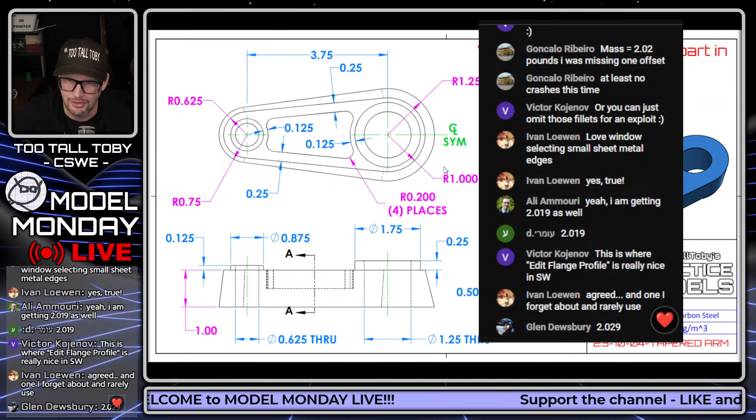What is the correct answer? The correct answer is 2.02 pounds. So let's see here, looks like that one is going to go to Victor K. GG to Victor K. Aaron C.

off by just a little bit. Will off by just a little bit. Could be a modeling technique. It's interesting they both came up with the exact same answer. They clearly modeled it in a very similar way. So there could be a little bit of a modeling technique issue there. It's always tricky when we have lofts and sweeps, although I did test this one with the merged tangent faces on versus off, and it still should have been within the tolerance.

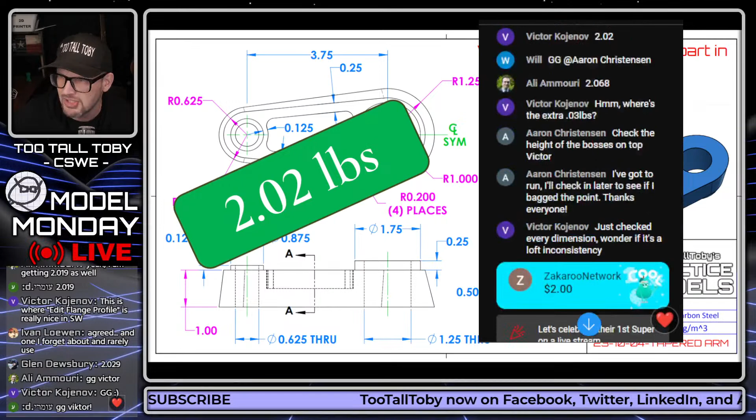So 2.02 is the answer. 2.04 would be the max tolerance there. 2.06 is outside of that tolerance. So, again, it could be a modeling thing, but GG to Victor K. Congratulations, Victor, getting that answer correct. 2.02 is the correct answer. That's going to give Victor the point. GG, Victor. GG to Aaron as well.

Both people. It can be made with draft. Could it be made with draft? I don't know if it could be or not. It's not really called out. I feel like the geometry twists too much in this region. So, I think it probably has to be made with either a sweep or a loft.